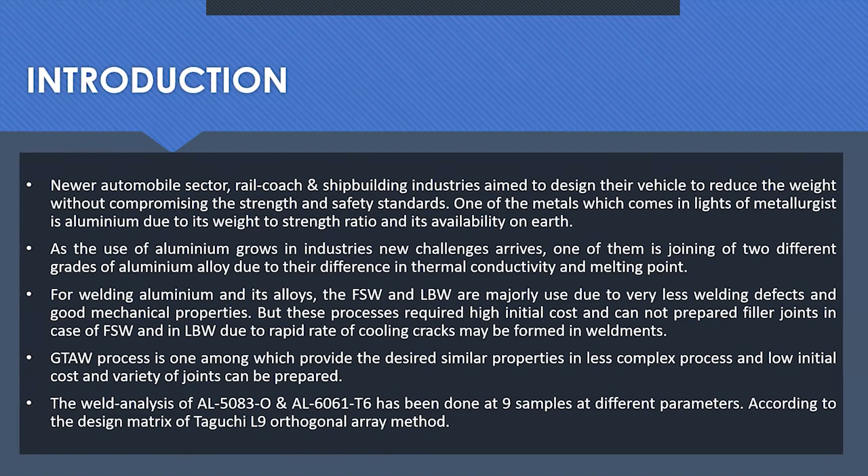The materials we use are two different grades, aluminum 5083 and 6061. 5083 is in annealed condition and 6061 is in tempered hardness condition at level 6. 5083 has the highest strength among non-heat-treatable alloys, and due to its high resistivity toward atmospheric attacks and corrosion, this grade is known as the marine grade of aluminum.

6061 belongs to the 6 series of aluminum alloy, where magnesium and silicon are major alloying elements, due to which the machinability and weldability of this material is very high, and the mechanical properties of 6061 are also very high.

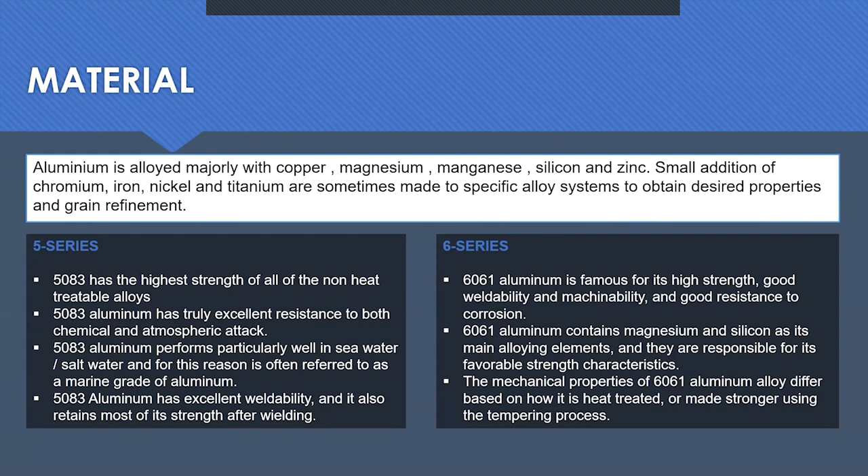Now come to the literature review. I will discuss only one due to time constraints. So let's come to the main one.

In reduction of heat affected zone, he found that in case of 6 series aluminum, the naturally aged condition of aluminum alloys has less decrease in strength value in the heat affected zone as compared to artificially aged condition.

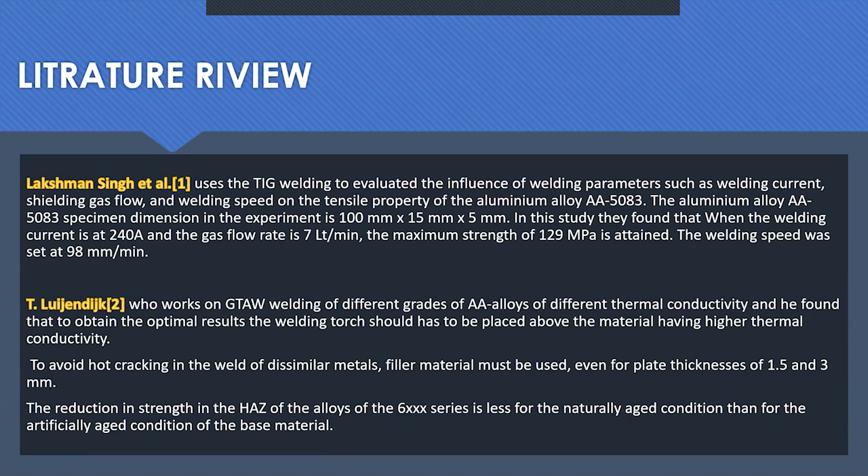The research gap we found in our study is that in TIG welding of aluminum alloy, most researchers have done welding on the same material; very few have worked on dissimilar metals. Second, in the testing part, most researchers are limited to tensile testing only, but very few have worked on micro hardness tests and other processes.

So in the case of welding of dissimilar alloys, a V-shaped butt joint has been prepared with a root gap of 2 mm. The most important factor we have included is the use of different filler materials.

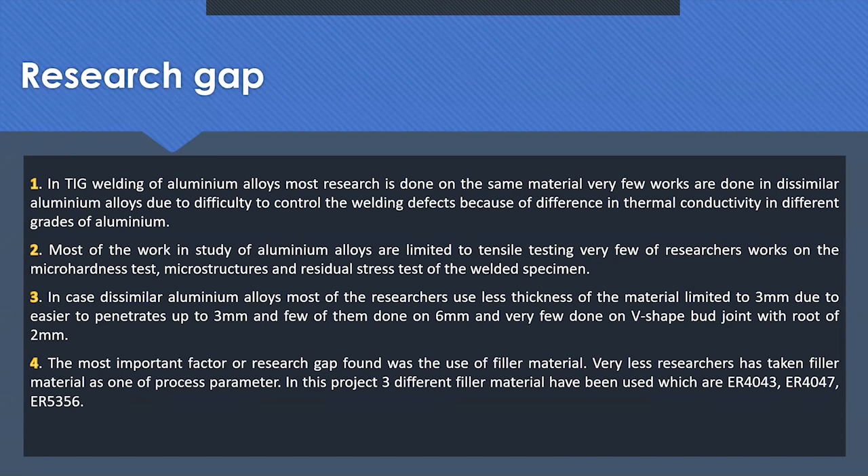In this study, 3 different filler materials have been used to make the V-shaped butt joint between 2 different grades of aluminum alloys. So the objective of this study is to optimize the process parameters.

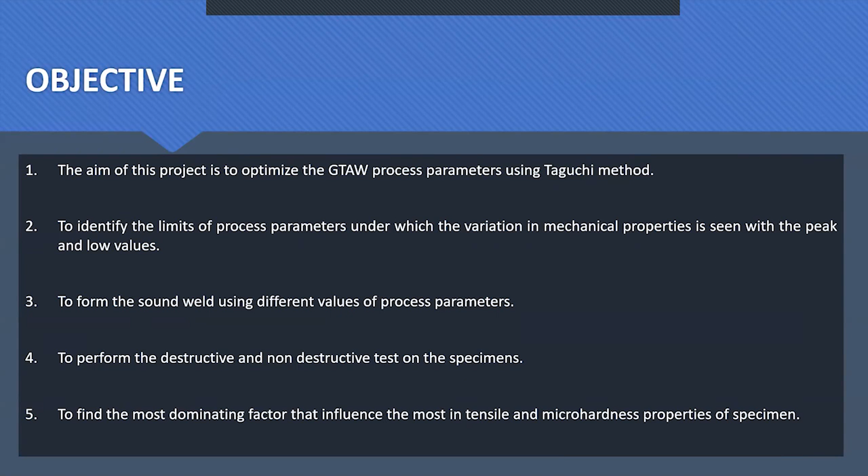We aim to optimize the process parameters used in our TIG welding process using the Taguchi method, identify the parameter under which variation of mechanical property is seen with low and peak values, form the sound weld under various process parameters, perform both non-destructive and destructive tests, and find the most dominating factor in case of tensile properties and micro hardness tests.

Now come to the experimental part. As discussed above, 2 base metals have been selected in the study: 5083 and 6061. In case of 5083, magnesium is the main alloying element; in case of 6061, magnesium with silicon is the main alloying element.

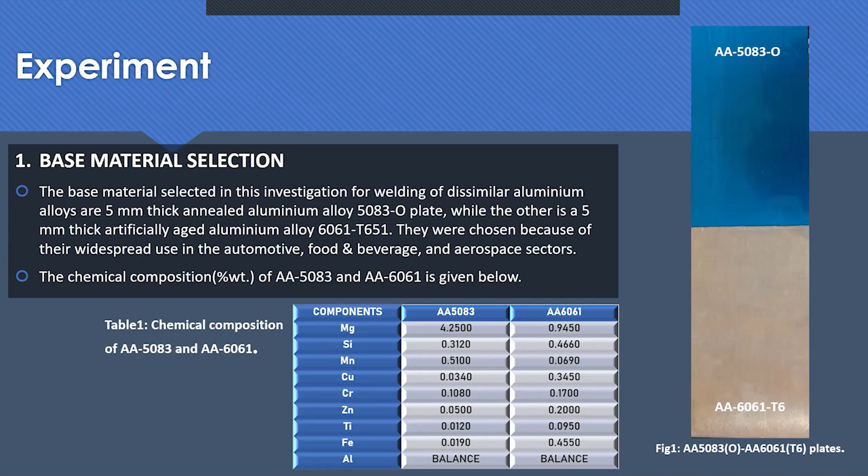Now comes the filler part. Three different fillers have been used. The first is 4043, mainly used for welding 6 series aluminum alloy. Next is filler 4047, known for silicon richness, and the third is 5356, mainly used for welding 5 series aluminum alloy.

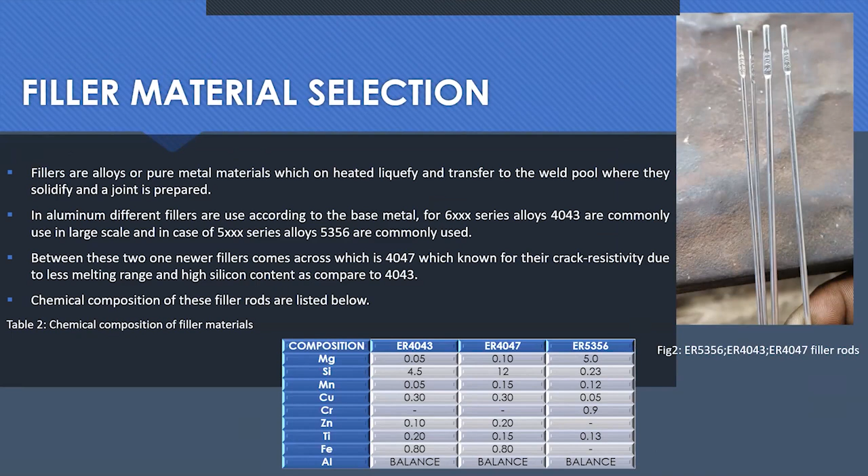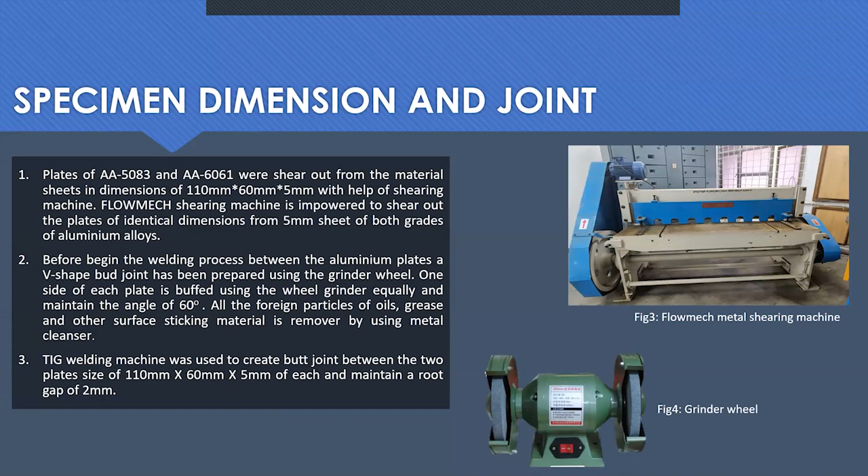Now come to the preparation part. The aluminum plates have been prepared in dimensions of 110 in length, 60 in breadth, and 5 in thickness using the shearing machine. The V-shaped butt joint has been prepared using a grinder wheel while maintaining the root gap, and then the welding process has been done.

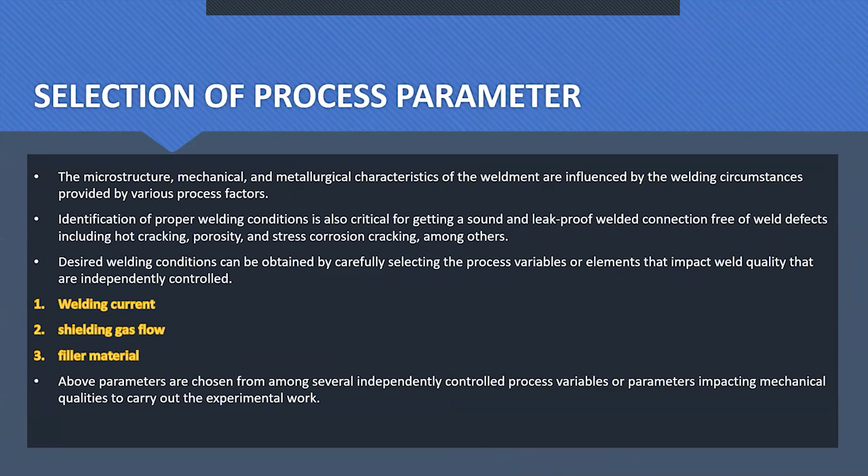The process parameters we studied are welding current, shielding gas flow, and filler material. Now come to the Taguchi design matrix. Taguchi's orthogonal array has been used for the optimization of these process parameters.

Using Minitab software, at three levels and three factors. The three factors are welding current, filler material, and shielding gas flow, and the three levels for welding current range from 180, 200, and 220 ampere.

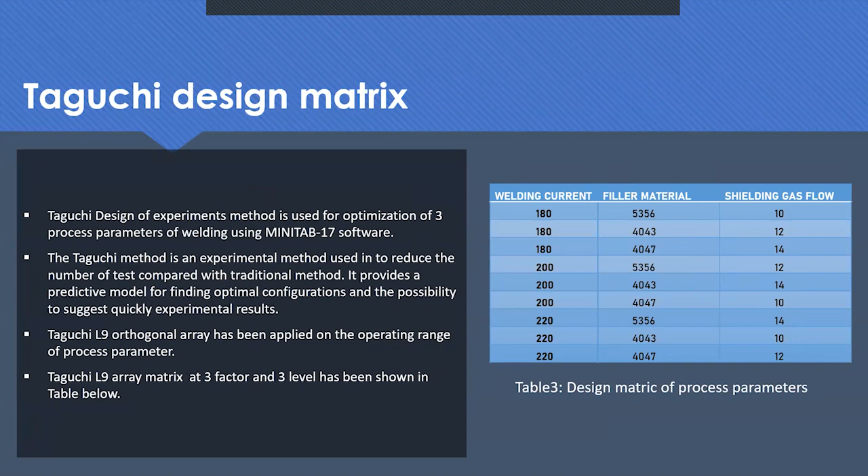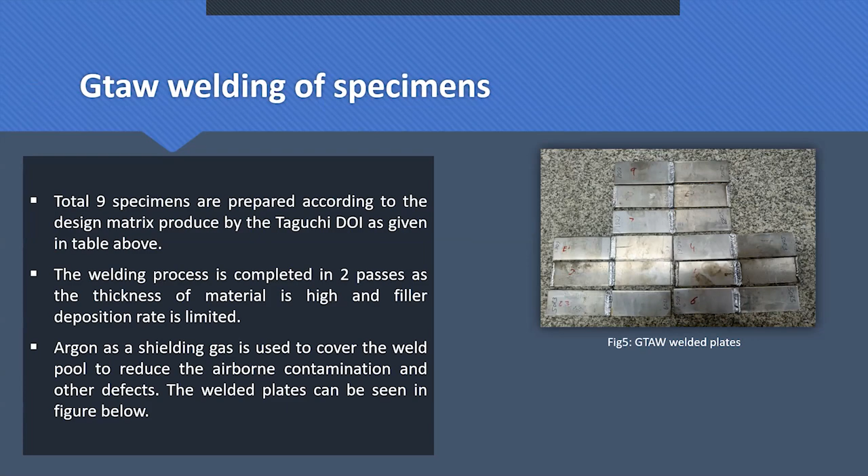For filler material, three different fillers have been used. For shielding gas flow, three different levels have been used: starting from 10 liters per minute, 12 liters per minute, and at last 14 liters per minute. These samples have been prepared according to the design matrix of Taguchi, and argon is used as

a shielding gas for shielding the arc between the non-consumable electrode and workpiece. Now to the testing part. For tensile testing, the specimen has been designed on SolidWorks, discussed in the figure below, following the ASTM E8M standard. Extraction of the specimen from the plates was done using the EDM wire cut method.

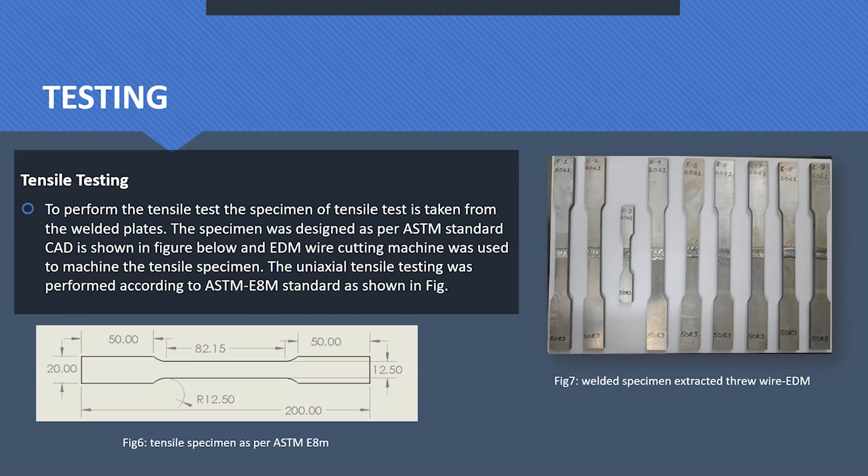At right, these are the nine specimens which were tensile tested. A universal testing machine with a capacity of 50 kilonewton was used, with a cross head speed of 2.5 mm per minute for tensile testing of each sample.

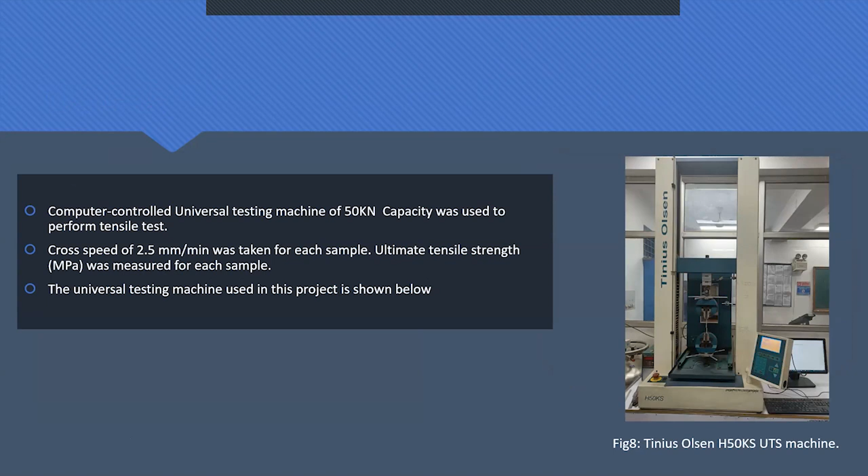Now coming to the micro hardness part, the specimen has been taken from the welded joint, comprising 5 zones: 2 base metals, 2 heat affected zones, and 1 weld bead. The specimen was cold mounted, and polishing was done using different grades of waterproof sandpapers ranging from 100 to 2500. Then the polishing is completed.

After that, a Vickers indenter is used for the micro hardness test with a load of 500 grams and dwell time of 10 seconds. In total, 3 indents have been taken in each zone, so a total of 15 indents on one specimen. At right you can see the micro hardness testing machine, with the Vickers hardened indenter.

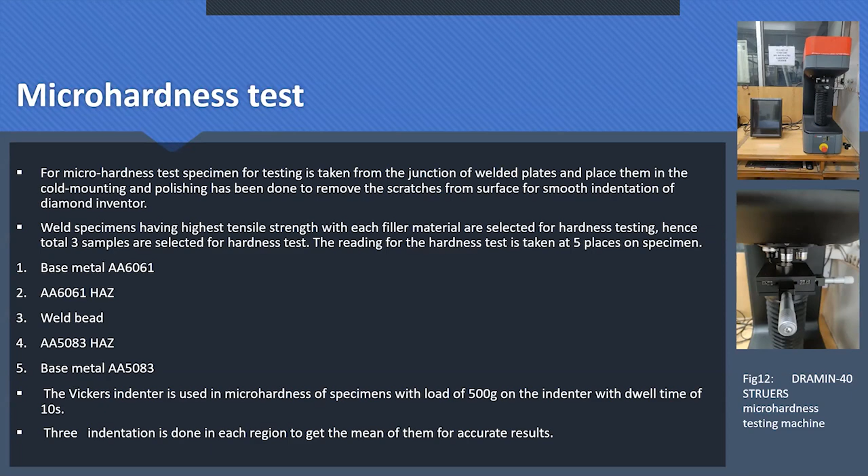Now coming to results and discussion. A total of 9 specimens have been tested. In the tensile testing, the highest UTS value achieved is 182 megapascal.

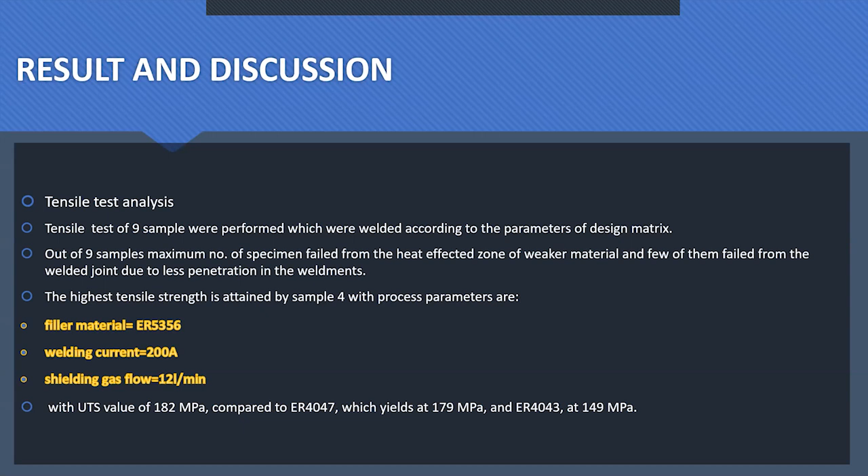This is for the specimen with parameters: filler material 5356, welding current 200 ampere, and shielding gas flow 12 liters per minute. For other filler materials, in case of 4047, the highest UTS value achieved is 179 megapascal, and in case of 4043, the value is 149 megapascal.

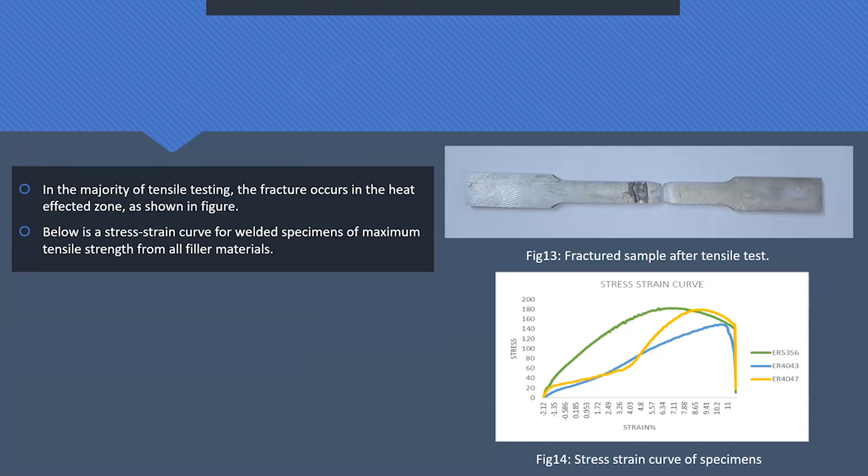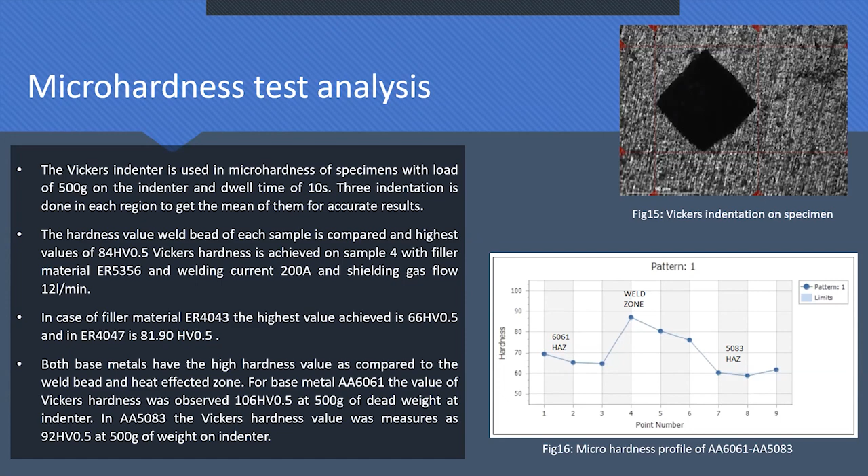As we can see at right, the profile of the hardness comprises three zones: two heat affected zones and one weld zone. We can depict that the high hardness value is seen in the weld zone.

Now comes the Taguchi analysis, done on both tensile testing and micro hardness tests. In case of tensile test, the most dominating factor is welding current, which has rank 1, followed by filler material, and then shielding gas flow.

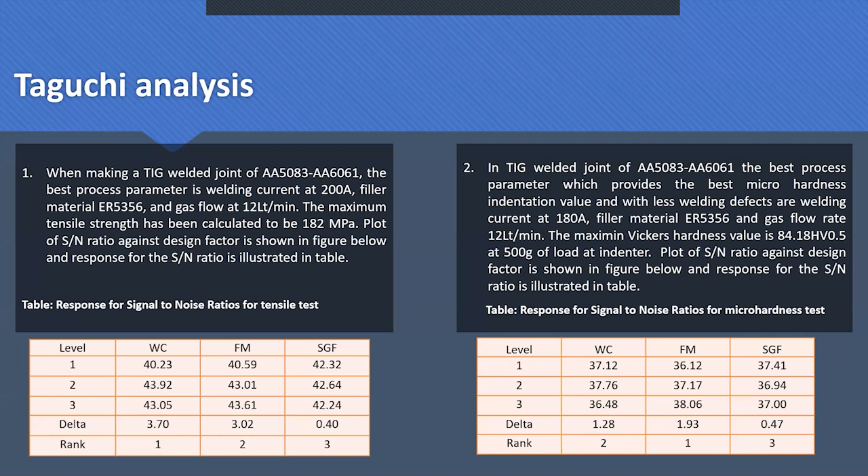In case of micro hardness test, the main dominating factor is filler material, followed by welding current, and at last shielding gas flow. These are the mean SN curves for both tensile test and micro hardness, for the highest-is-better design Taguchi matrix.

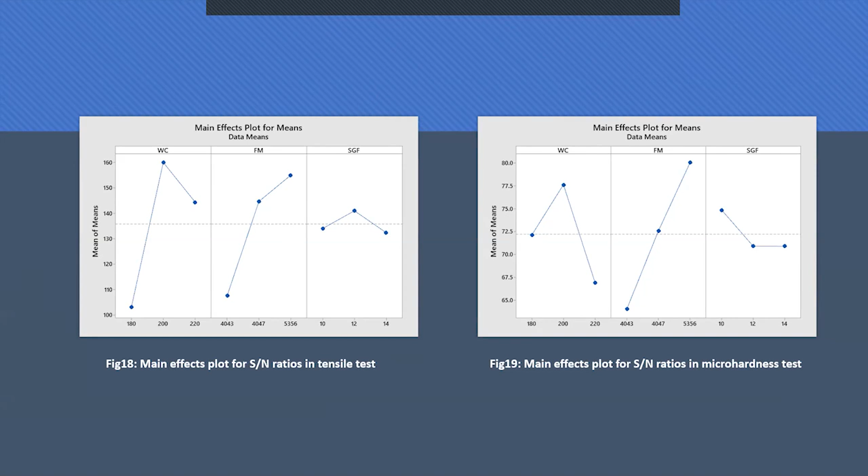The optimum value achieved for tensile testing is welding current 200 ampere, filler material 5356, and shielding gas flow 12 liters per minute. While for micro hardness, the optimum value is welding current 200 ampere, filler material 5356, and shielding gas flow 10 liters per minute. Now coming to the conclusion part.

In tensile testing, the optimum value of 182 megapascal is achieved in a specimen with filler material 5356, welding current 200 ampere, and shielding gas flow 12 liters per minute. For the other two materials, the highest UTS value is 149 megapascal in case of filler material 4043, while for 4047 the value is 179 megapascal.

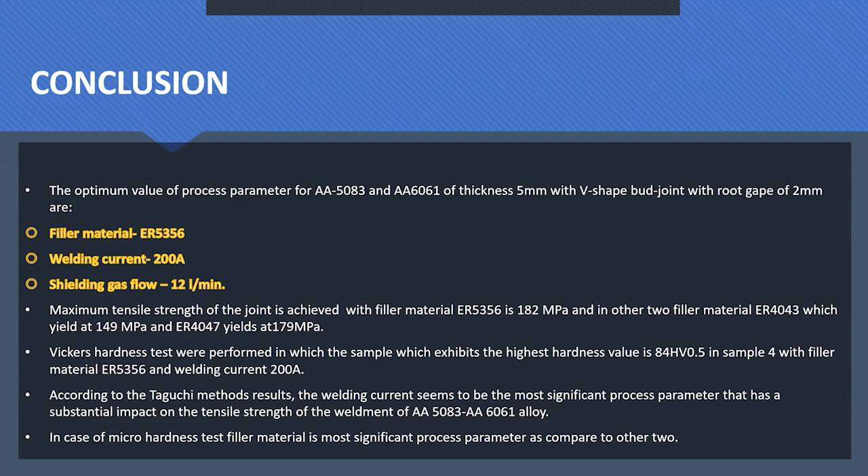For the hardness part, the highest Vickers hardness value achieved is 84 in case of specimen with filler material 5356. According to the Taguchi optimization method, the most dominating factor for tensile testing was welding current, while for micro hardness, the most dominating factor is filler material. Thank you.